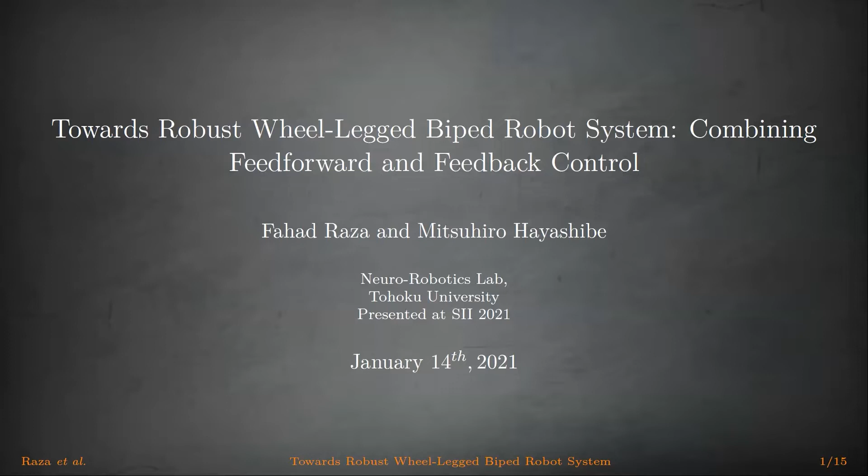In the recent past, wheel-legged robots have captivated the robotics research community because of their higher maneuverability and small footprint. These robots have the potential to be used autonomously in hazardous spaces as well as for commercial purposes.

A rather common example of a wheeled self-balancing robot is the modern Segway, which helps commuters avoid rush hour city congestion. However, these robots are extremely susceptible to external disturbances, and for this reason, fall prevention remains the focus point of many studies.

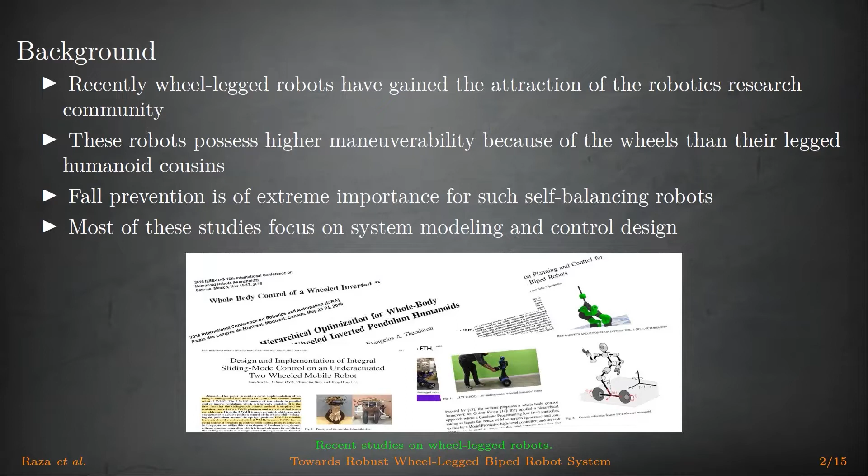In the modern literature, both linear and nonlinear control methods are proposed. For example, recently a robotics team from ETH Zurich developed a small two-wheeled jumping robot for the indoor environment using a linear LQR controller. Another group from University of Pisa in Italy introduced a nonlinear computed torque method to control a wheeled humanoid robot.

As we know, linear controllers perform well over a small operating region, and their performance is not consistent outside of the linear approximation. On the other hand, model-based nonlinear control methods, such as computed torque controller, depend on system modeling. However, mathematical models are only a good approximation of the physical system, and for this reason, such controllers may not perform sufficiently on real systems given model mismatches such as friction coefficients of the actuators, inertia matrices, and position of center of mass.

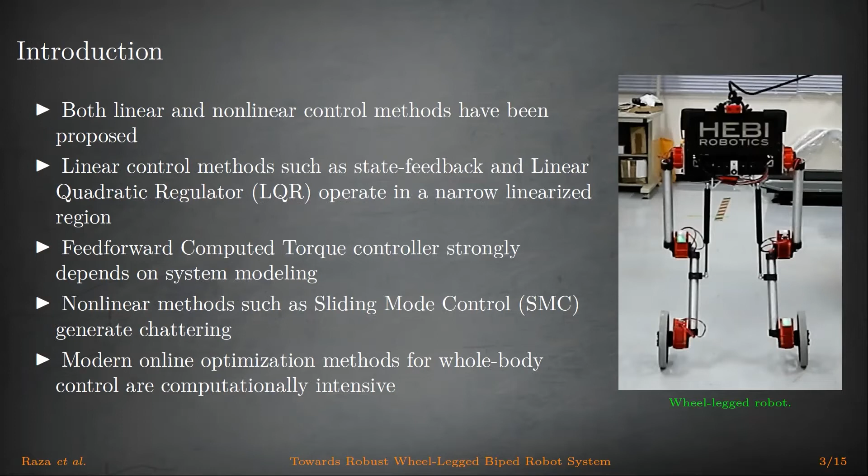Modern online optimization methods have also been used recently. Nevertheless, they are computationally intensive, and there is always the chance of underpowered performance due to non-optimal solutions. Given all this, in this study, we propose a new control framework that combines the linear feedback LQR controller with the nonlinear feed-forward computed torque method.

In the real world, not only do actuators have different friction coefficients, but they also change over time because of abrasion and other factors that cannot be modeled beforehand. Our main motivation is to implement a computationally simple yet robust controller that may compensate for such model uncertainties and external disturbances.

We started with formulating the nonlinear dynamical model of the wheel-legged robot. Once we obtained the mathematical model of the system, we designed both the linear feedback LQR and the nonlinear feed-forward computed torque controller for our system. The proposed control framework then combines these two methods.

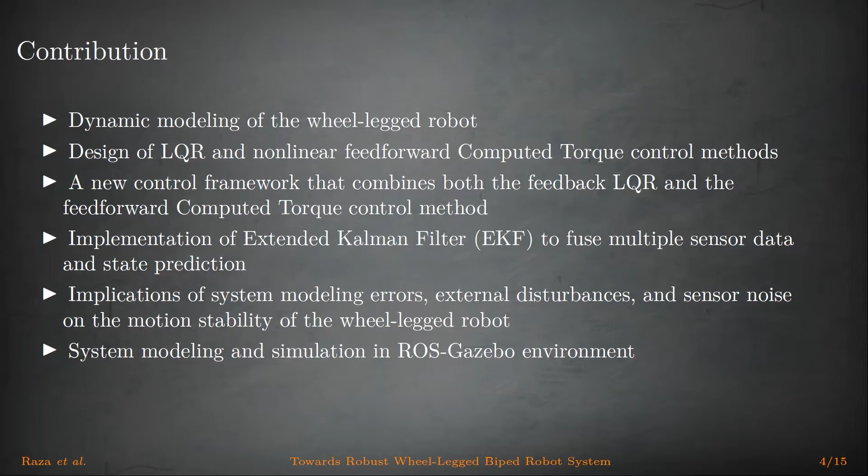Furthermore, we also applied an extended Kalman filter to fuse data from multiple IMUs and wheel odometry in order to have a better state estimation. Finally, to validate and compare the performance of all three motion controllers, experiments are performed in the Gazebo simulator and on the real system as well.

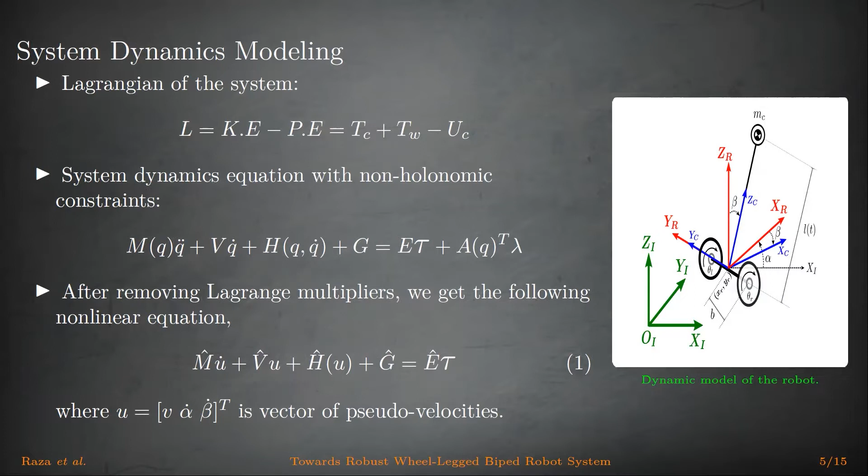Once we have the equations of motion of the system, we can linearize it about the equilibrium point of the robot by making small angle approximations. Here we assume that the pitch angle beta of the robot stays very small, and hence we obtain the linearized form of the equations of motion of the system.

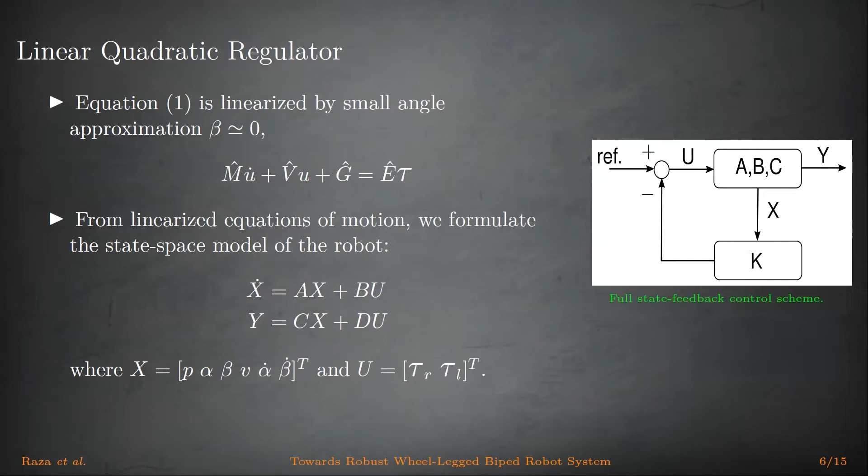To design the linear quadratic regulator for the robot, we formulate its linearized equations of motion in a standard state space form. Here, the state vector x consists of 6 states, namely translational position, yaw angle, pitch angle, and their corresponding rates of change, whereas torques of the right and left wheels of the robot are the inputs to the system.

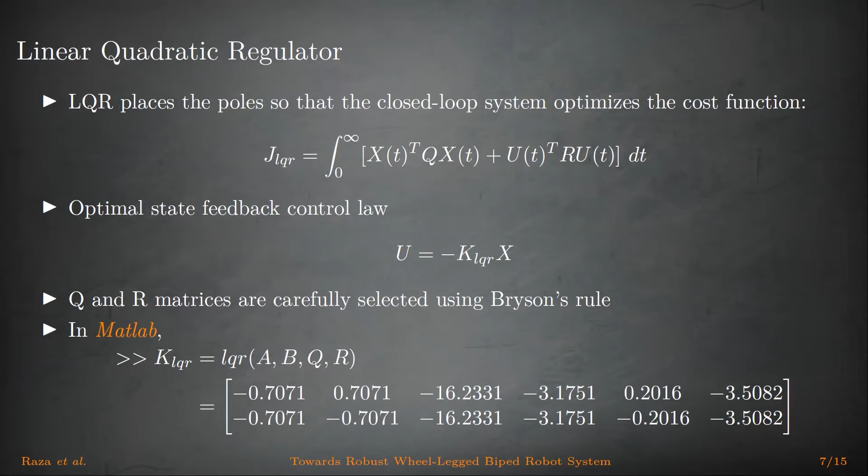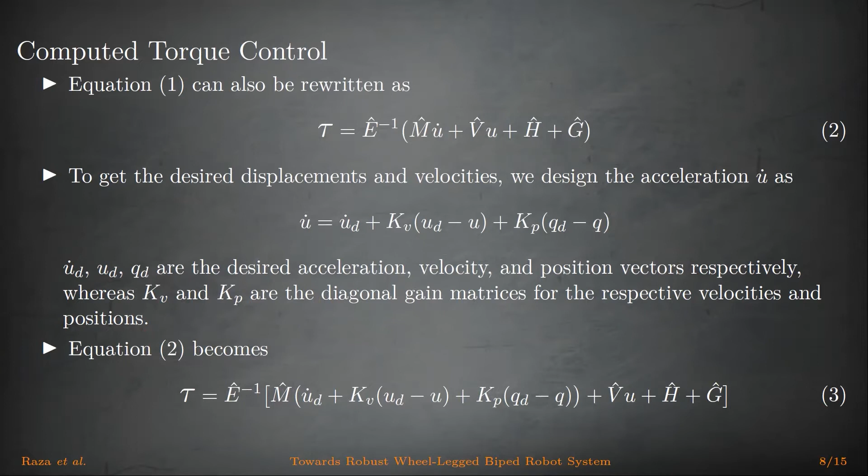Finally, these well-estimated system states are provided to the LQR and the computed torque controllers. The output from both the controllers is merged and applied as wheel torques of the robot.

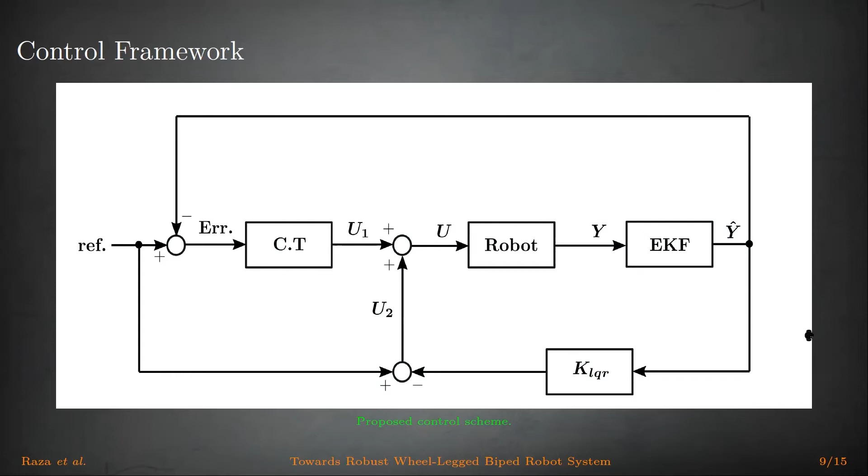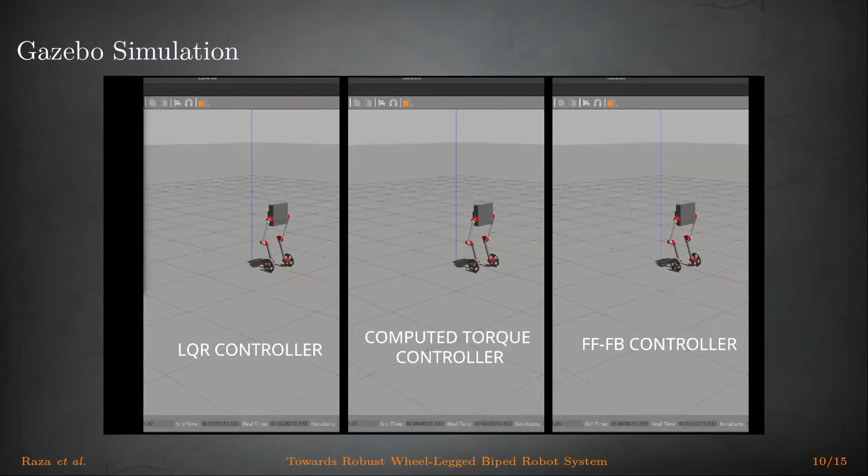This video shows the simulation of the robot in the ROS Gazebo environment. Firstly, a 0.5 meter step command of translational position is given. It can be clearly observed that the proposed control law, which is shown on the rightmost side, converges faster than the rest of the two controllers.

Secondly, to observe the yaw angle tracking of the robot, a sinusoidal yaw angle reference is given to the robot. Clearly, simulation results do not demonstrate any huge difference among the performance of the presented controllers.

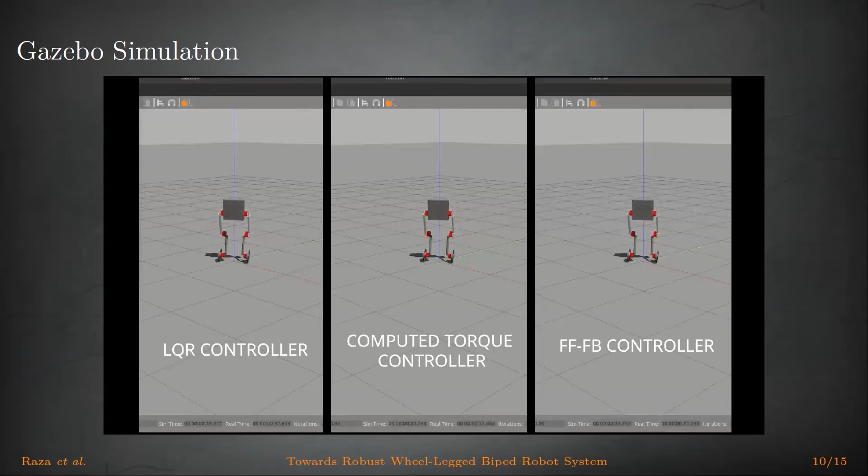In the third experiment, we applied a force of 15 Newton on the robot's body in the forward direction to simulate an external push. This experiment also proves the effectiveness of the combined feed-forward feedback controller against such disturbances. The given plots of the simulation experiments provide us with better quantitative insights about the three controllers.

As evident from plot A and plot C, the combined feed-forward feedback controller outperforms the other two controllers in step response of the translational position and during the external pushes. However, all three controllers have the identical response to yaw angle trajectory following, as shown in plot B.

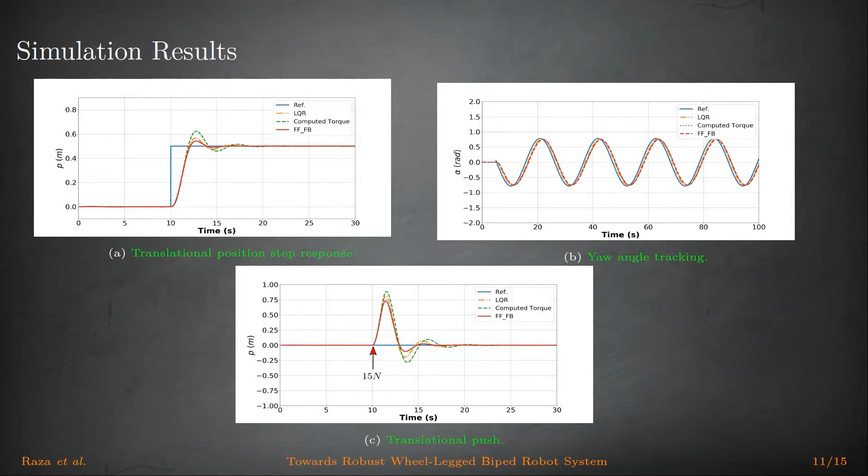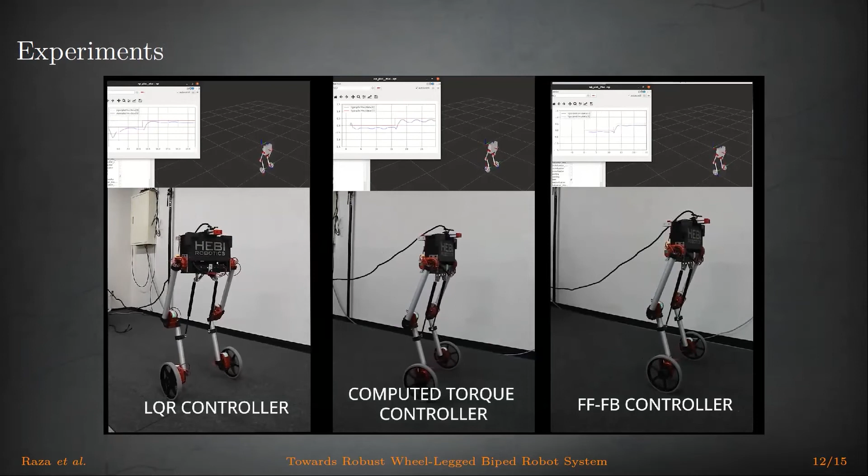Now, let's move on to the real-world examples. This video shows all three experiments performed on a real wheel-legged robot. We started from the same translational step response first. Then we move on to the yaw tracking experiment.

It is interesting to note how LQR and computed torque controllers could not maintain the stable translational position while tracking the yaw angle, which was not evident in the simulation experiment. However, the proposed combined feed-forward feedback controller is stable and following the yaw angle nicely.

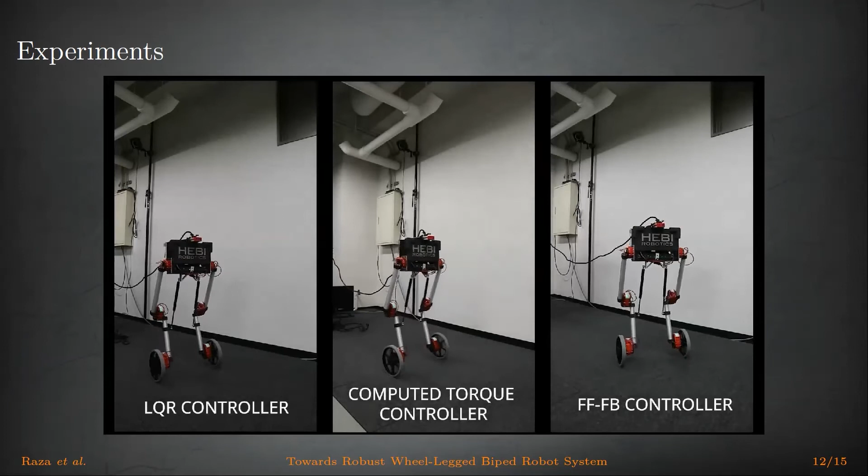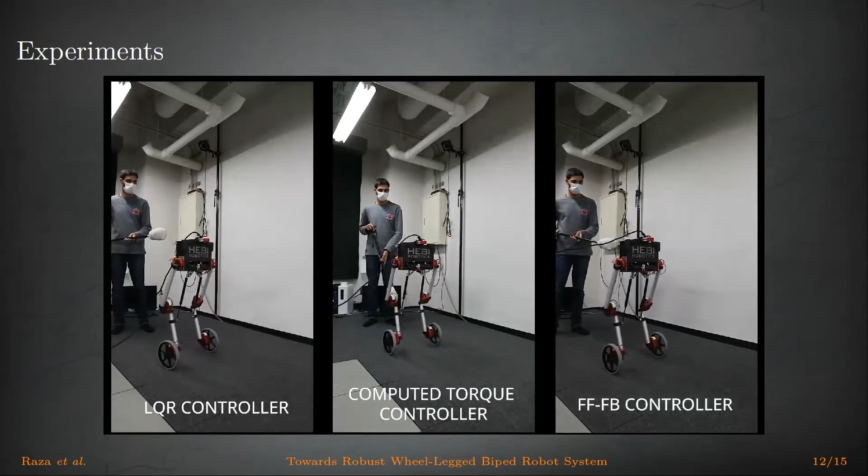Finally, to emulate the external push of 15 Newton force, we applied external pushes to the robot's body several times to get an average measure of the controller's performance. The following plots compare the performance of all three controllers.

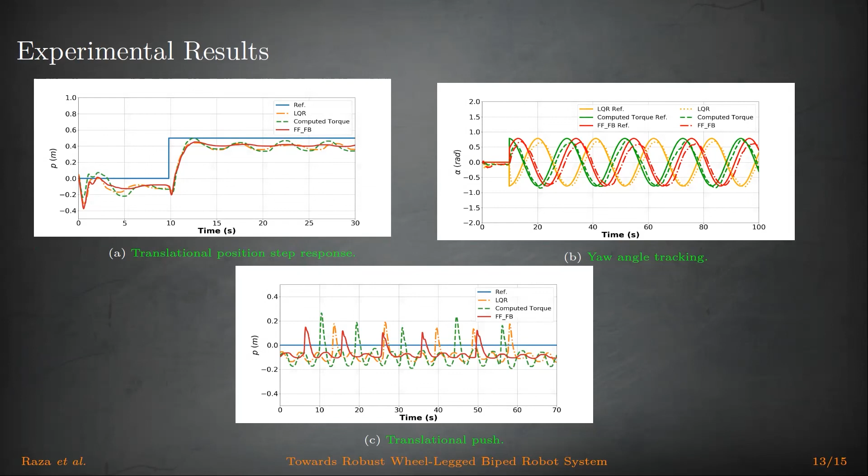Overall, the differences between the simulations and the real robot results have revealed that the model-based nonlinear computed torque controller or the linear feedback LQR is inadequate to compensate for the modeling errors and other uncertainties that cannot be modeled. On the other hand, the combination of the two methods perfectly complements the overall performance without any extra mathematical and computational resources.

In this study, we presented a computationally simple yet robust controller to stabilize and steer a self-balancing wheel-legged robot. An extended Kalman filter is utilized to fuse the data from multiple sensors and get better system states. We have compared the proposed controller with the linear LQR and the nonlinear computed torque controllers, both in the simulations and on the real system.

Finally, it has been validated by several experiments that modeling uncertainties and discrepancies worsen the effectiveness of the model-based LQR and computed torque control methods. For our future study, we plan to include roll stabilization as an extra degree of freedom for the robot using its knee joints. Moreover, we believe that centroidal dynamics control for wheel-legged robots is quite an interesting field to explore in our future studies.